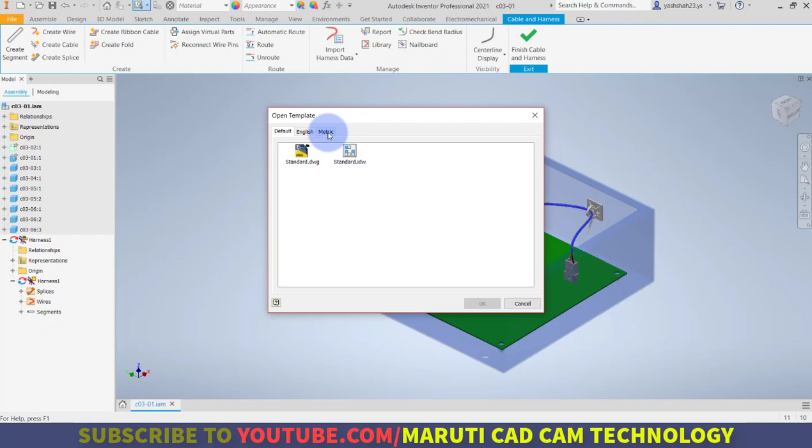Now, next we are going to create a two-dimensional nailboard drawing. So in order to create a two-dimensional reference document, or to create a full-scale nailboard that a wire harness can be constructed with, all you have to do is select the nailboard tool with your harness active. So here the nailboard command is there. So click on that, select the template that you will use, and click on OK.

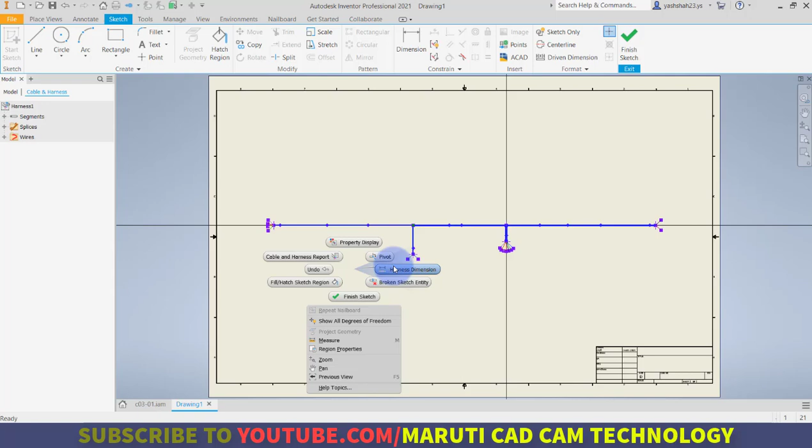So it will be generating a drawing. What Inventor will do is take your existing harness and lay it out flat. The results may or may not be exactly what you want, but initially it will lay out your drawing like this at a scale of 1:1. You can augment this drawing by adding things like harness dimensions. So I will just right click and click on add harness dimension rather than using a normal dimension.

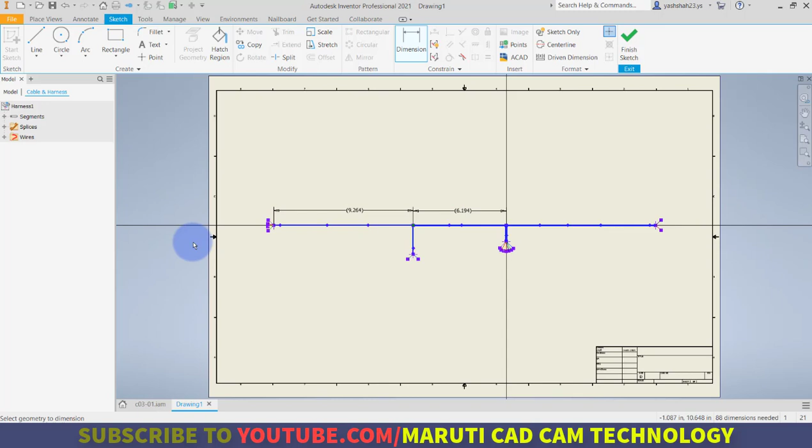So all the dimensions have now been added. Similarly, I can also add some other changes. So I can right click and click on property display, click on all parts, all pins, pin name, and simply click on OK and specify the direction of location.

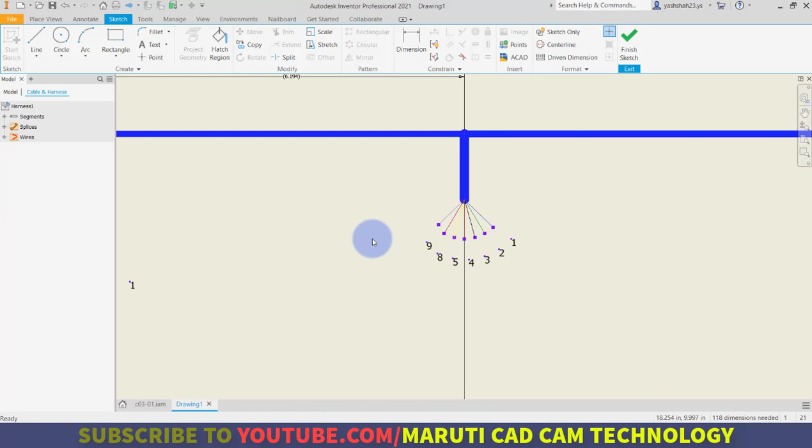So now as you can see, all the pins are displayed with the label with a different color value. This gives a great visual representation of the color of the wire compared to the pin that it goes to. You may also need to make modifications to the physical appearance of the harness as well. For example, these pins are a little too close together.

I can right click on this point and go to fan in/out, go to fan out and specify the angle, let's say 150 degrees. Okay. So now as you can see, it changed the angle to around 150 degrees and it just gives them a little bit of extra spread.

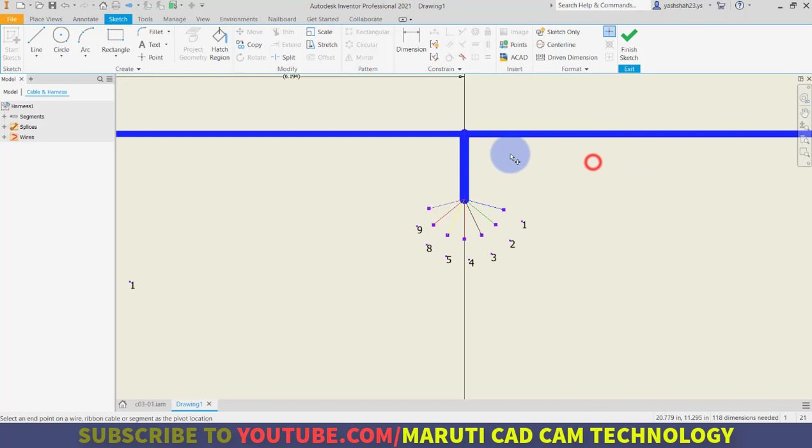I can also set a pivot by right clicking, and there is the option of pivot. This is my starting point of the pivot. This is my ending point. Click and drag. So it will help me to add the pivot as well.

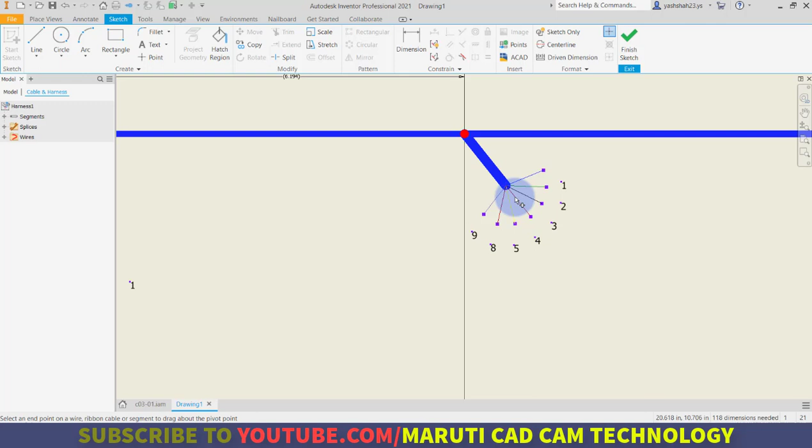While this might not be totally necessary for a shorter branch like this, if you have a large number of branches that are close together in your 2D nailboard, you can spread them out a little bit or pre-position things so that they display in a proper loom. So I will just click on finish.

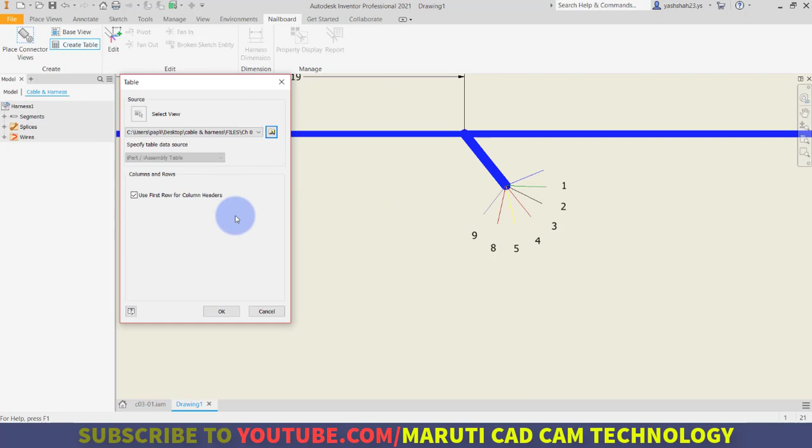And here there is the option of create table as well. So I can click on create table and import the files, an Excel CSV file. In the last video I exported the CSV file, so you can also bring that table into your drawing as well. So this is your CSV file which is going to be imported.

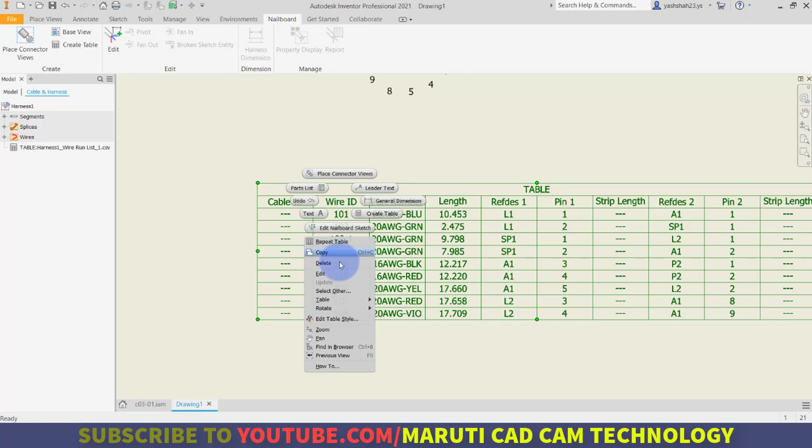So now I can double click on this table or go to edit, and here there are options for ID, cable ID, wire ID, part number, and you can also edit the information from here as well.

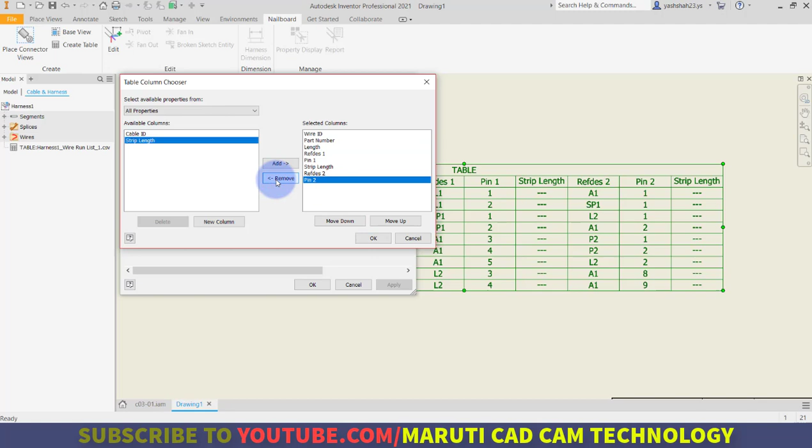Now next there is also the option of adding or removing columns. So I can double click on the table. Here there is the option of column chooser, and from here let's say I want to remove the cable ID and strip length. So you can also remove strip length and cable ID from this list as well. So double click, column chooser, strip length, also remove. Okay.